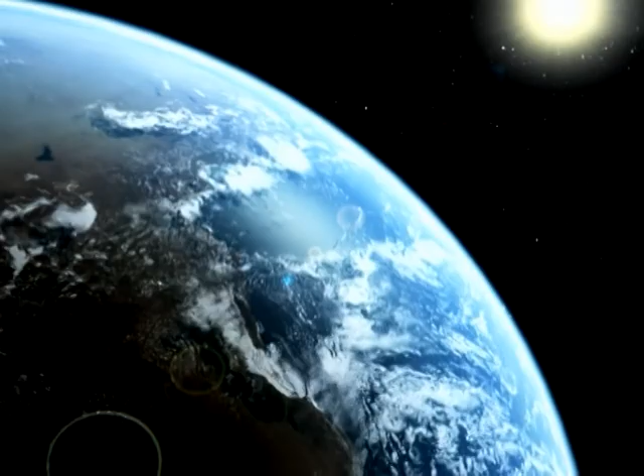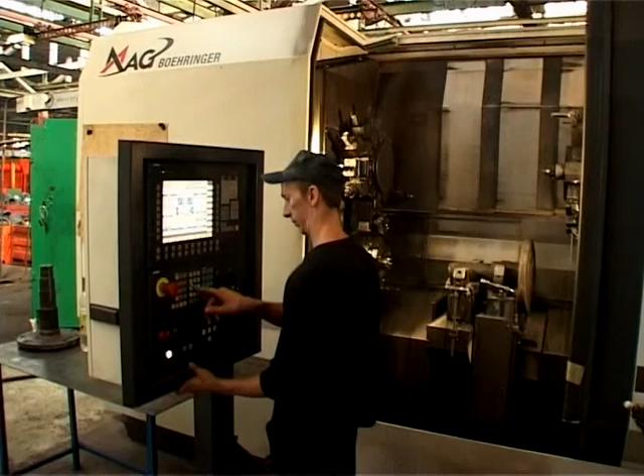The Republic of Belarus, the city of Gomel. There are main plants of the company Gomselmash, which has been known in the market of agricultural machinery since 1930. The modern Gomselmash is an innovative way of development, flexibility and multiple profiles, manufacturing different models of machinery for different purposes, providing most technological processes connected with harvesting of the main agricultural crops with machinery made by one manufacturer.

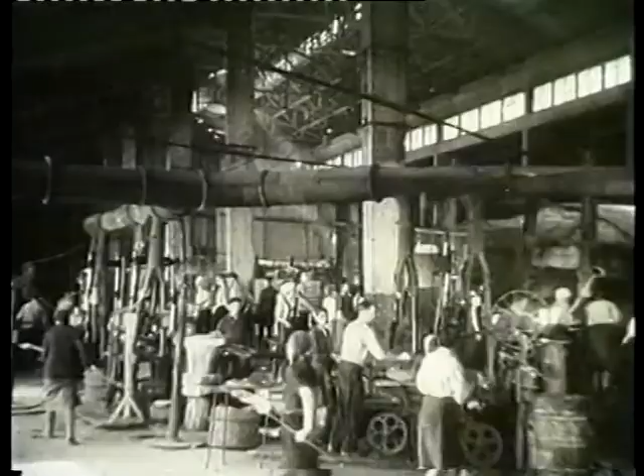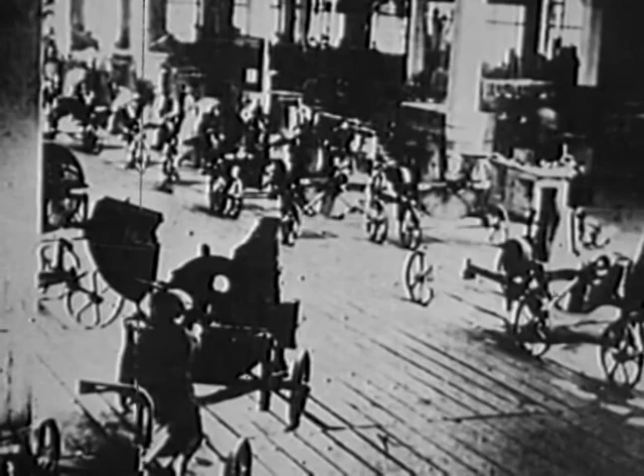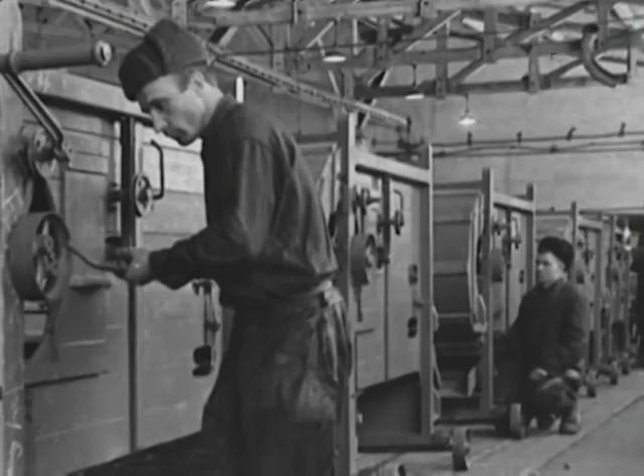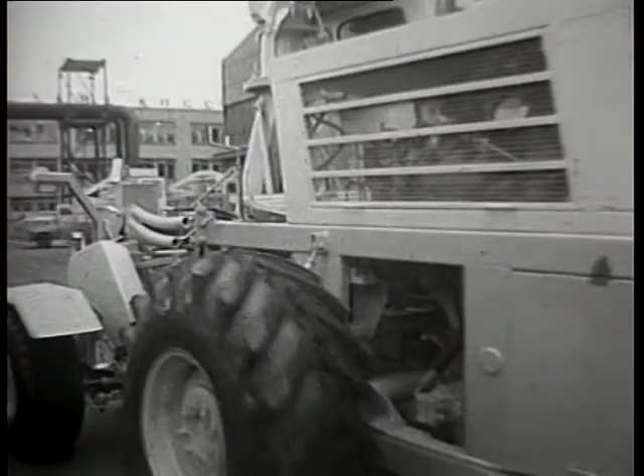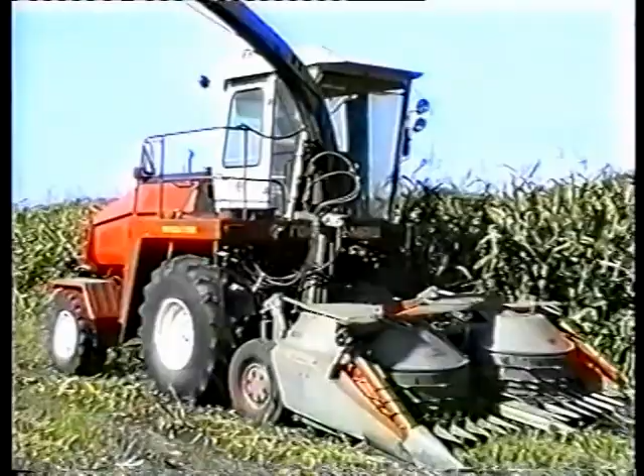From manufacturing simple agricultural machinery in the 30s and 40s, to the largest manufacturer of pull-type and then self-propelled forage harvesters, from a plant to a large production association, this is the way Gomselmash has passed in the next four decades. The acquired experience was used in manufacturing block module complexes of machinery on the basis of the universal power machine, which came off the production line of the association at the end of the 80s. It was the power machine that became the basic one, on the basis of which the constructors of Gomselmash manufactured grain harvesting complexes at the end of the 90s. The machinery opened a new important branch in Belarusian machinery construction.

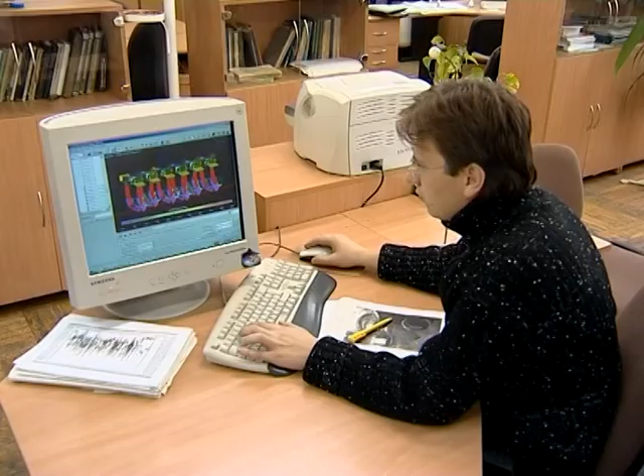The absolute priority of the customer's demands, care of his profit, are at the basis of the whole work of Gomselmash, beginning at the first stage of the creation of a new machine. The design and service of the company is a large, well-equipped scientific technical center. Its specialists solve problems of how to create machinery which would be effective not only in the present, but also in future conditions. Virtual studies allow getting a highly reliable image of functioning of units of the future machine at the early stages of design.

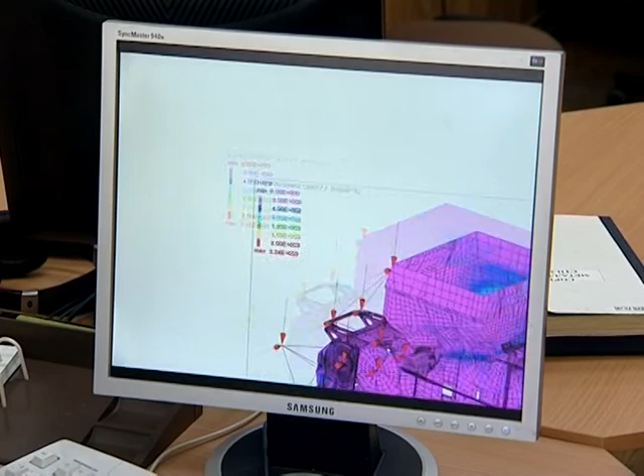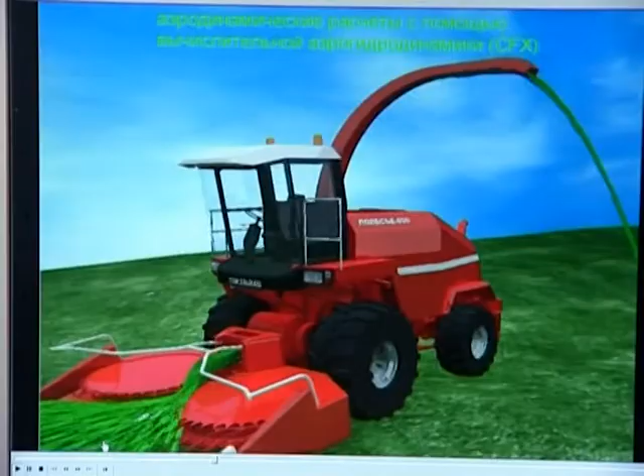If necessary, calculations using supercomputers are made. Specialists from different scientific research institutes of the National Academy of Science are invited. The modern instruments used by constructors allow shortening the time of creating a complex machine at least 1.5 times in comparison with recently used computer technologies.

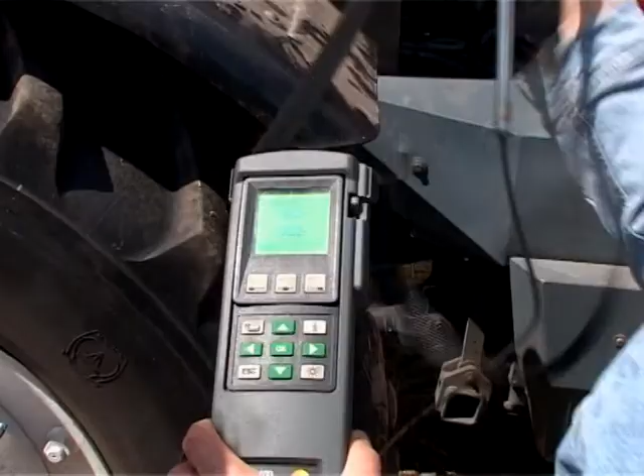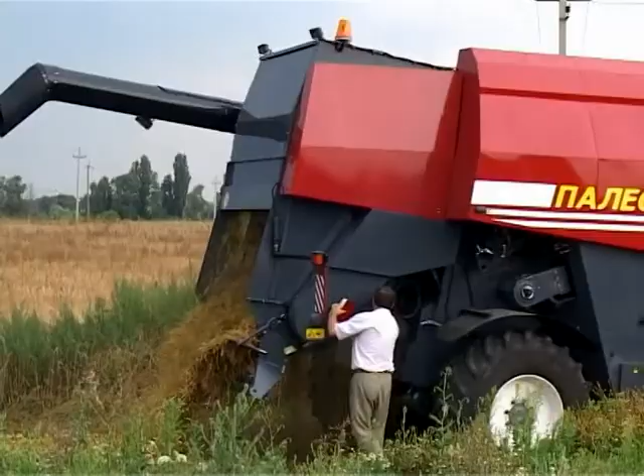Field tests done in different soil and climatic zones give the constructors material for detailed analysis and improvement of the machines being created. To provide the maximum effect from each kilowatt of the engine's power, from each liter of fuel, to raise the quality of harvesting and lower the payback period are the tasks of the creators of the machinery.

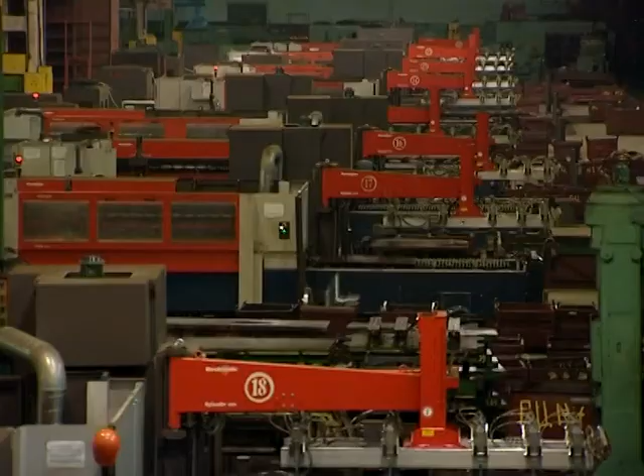In order to react promptly to the demands of the market of agricultural machinery, Gomselmash constantly renovates its technological equipment. At the same time, priority is given to flexible engineering complexes from leading manufacturers whose products are considered to be the best in the world.

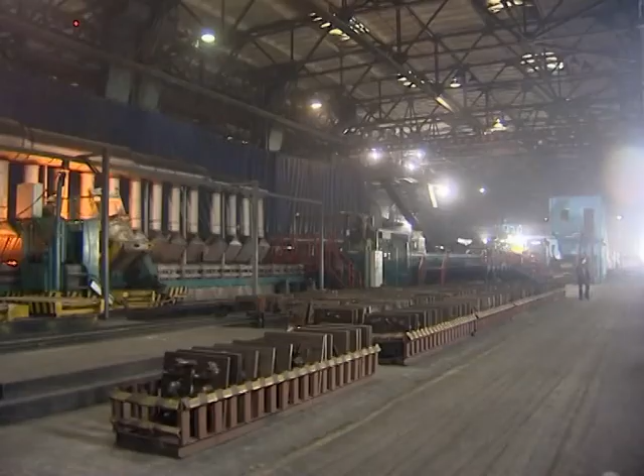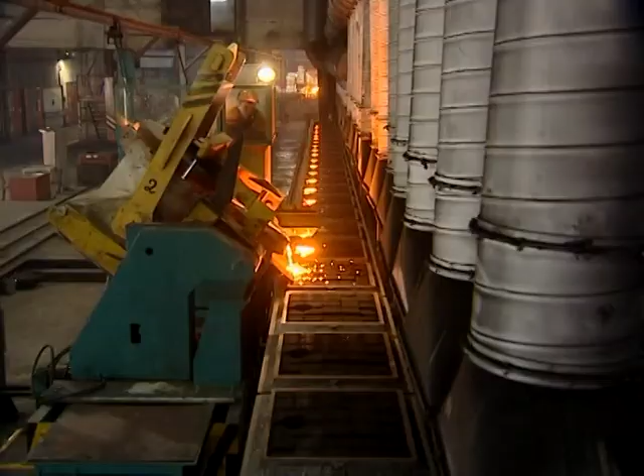Of great importance for Gomselmash are works on the modernization of the foundry. In the foundry, there are inductive furnaces of average rate for smelting cast iron of high solidity. These furnaces work automatically and have program control of charging of the furnace. To perform melting, they choose the most economical regime of energy efficiency. The molding line with CNC works efficiently. Along with economy and getting metal of high quality, the new equipment allows improving ecology.

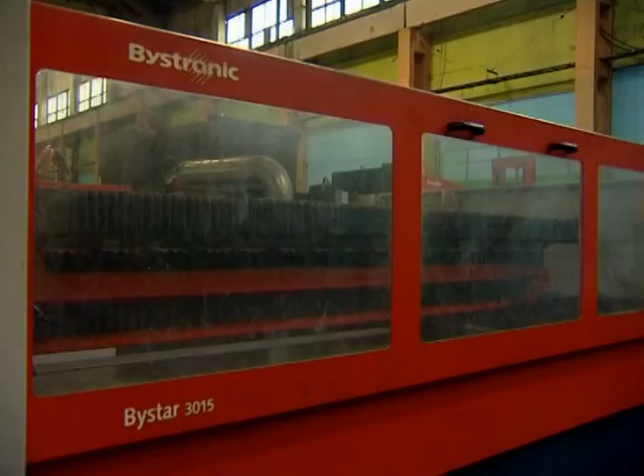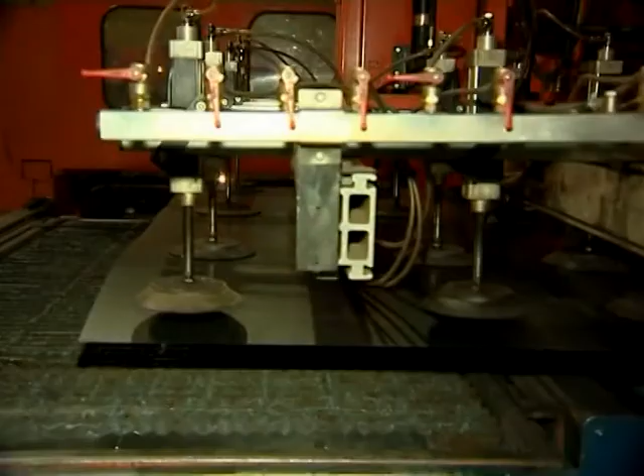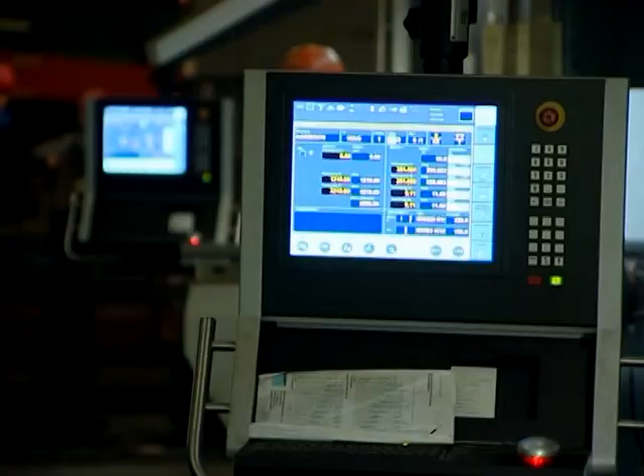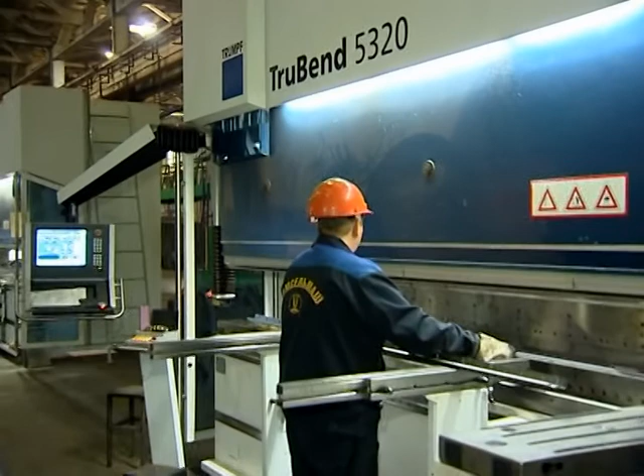In press preparing production, laser cutting machines with CNC control allow cutting out parts of any configuration from metal sheet with thickness up to 14 mm, completely at once, without additional machining and with minimum waste. Operation rate is kept up with automatic transport systems which feed metal sheets for cutting. Sheet bending machines with CNC control keep in their memory 50,000 kinds of different bendings. Parts of complicated shape are bent in different planes up to 10 times. Such rapid manufacturing of complicated parts without expensive press tools and welding is cheaper, more durable and with high accuracy. This is the main quality of the laser cutting machines and presses with CNC control.

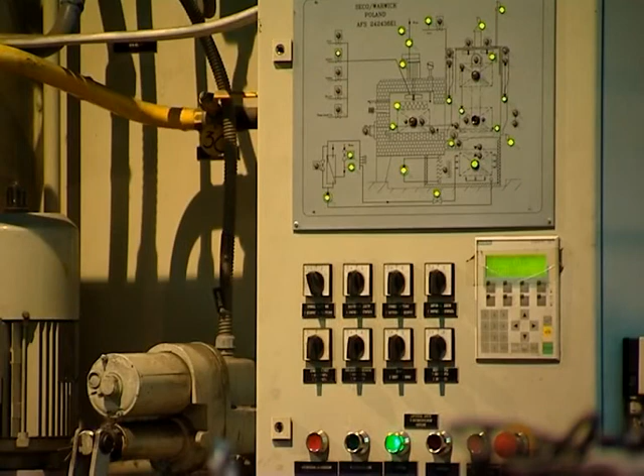In heat treating production, automatic lines of chemical heat treating allow performing complex processes of heat and chemical heat treatment of metals such as carburizing, carbonitriding, hardening, clean annealing, low and high tempering. All processes are controlled automatically with the help of program software with minimum participation of the operator.

This allowed raising considerably the quality of heat treatment of units and the reliability of manufactured machines, improving working conditions and lowering power intensity. The mechanical process in production is equipped with new, progressive equipment with CNC control of the processing center type.

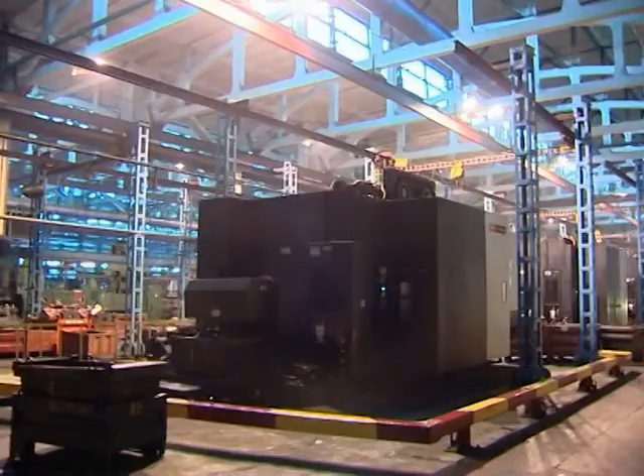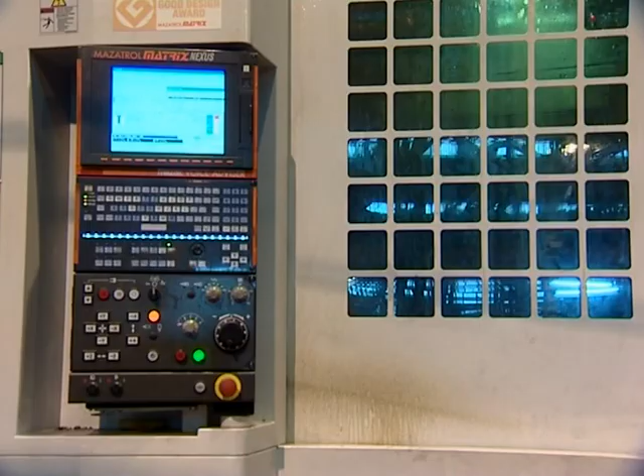This raises labor productivity from 2 to 5 times. Multipurpose lathes with the use of the driving tool work at high speed. The equipment with the new type of tools allows treating complex units on two sides at one and the same time.

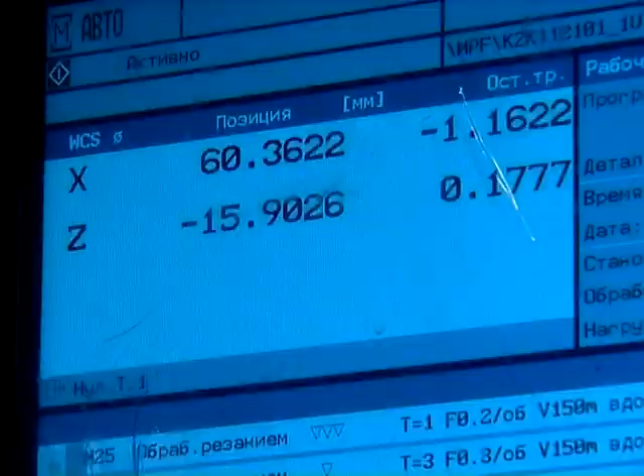Highly efficient centers for the treatment of gearboxes and highly accurate equipment for manufacturing gears raise the quality of manufacturing of mechanical transmission. Modern measurement machines are used to raise the accuracy of manufacturing of units.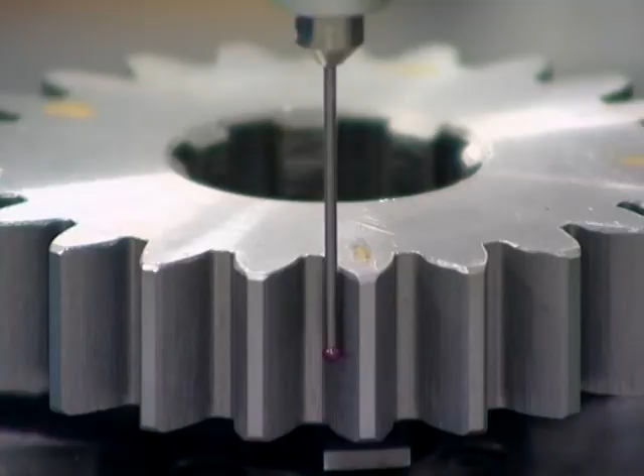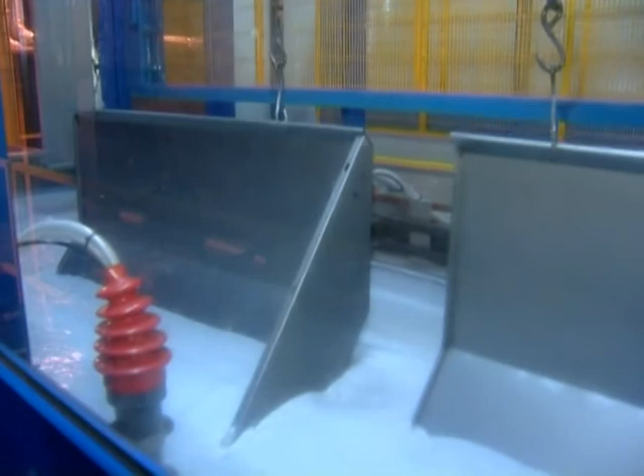The introduction of modern technologies in paint production allows getting covers of exceptional solidity with improved decorative features. In the combined production system with computer control and management, ground is laid with the help of the method of cataphoresis, merging with the metal at the molecular level. Use painting in automatic regime by dispersing powder paints without using solvent.

Grain harvesters became the main product of the production association Gomselmash, and in order to enlarge the capacities of their production, deep modernization of the general assembly and production line with the opening of a new conveyor line has been done.

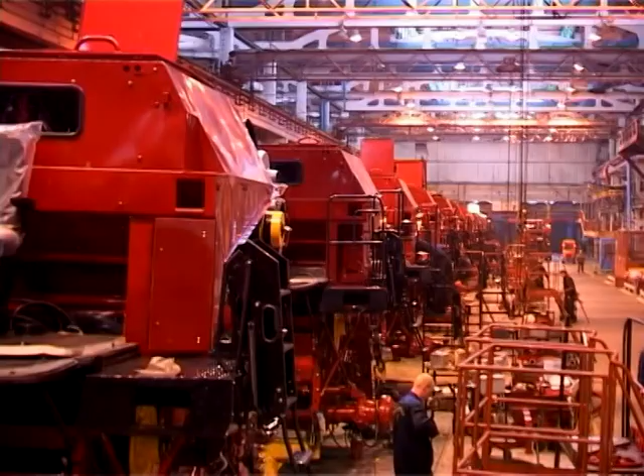Since 2008, grain harvesters have been assembled on the new line, and the selective delivery of units from the block of workshop donors is done by the system of pendant lines.

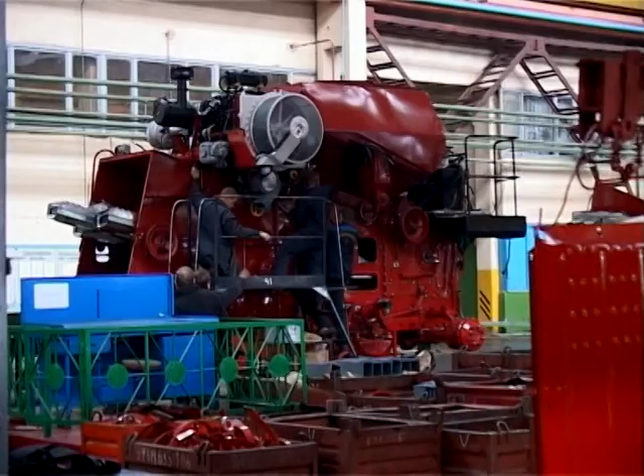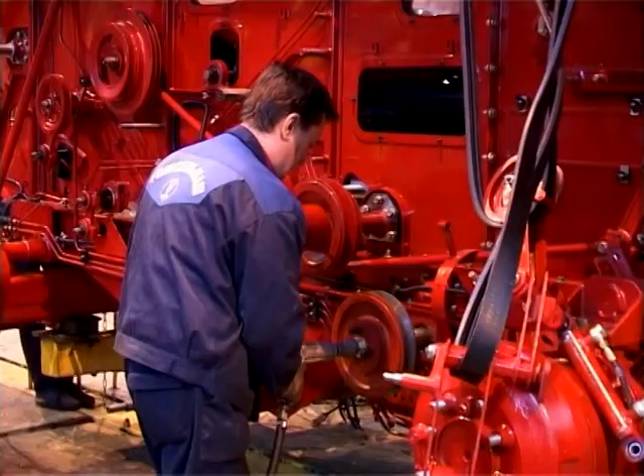The manufacturing of all models of grain harvesters in the modernized assemblage production provides the growth of the quality of assemblage and makes Palesia harvesters more attractive for customers in different countries and regions.

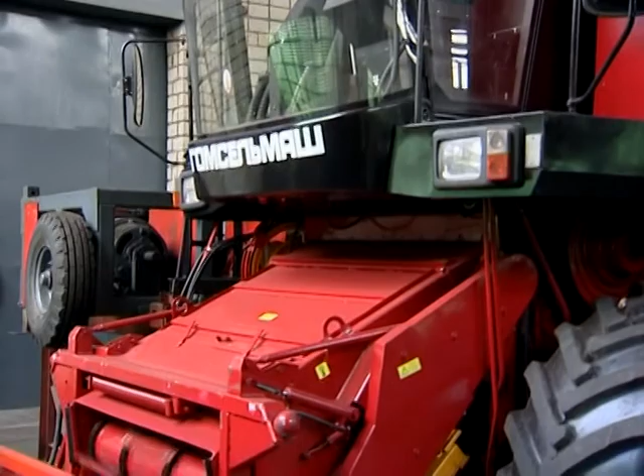Systems of management of the quality of design in production and technical service of the manufactured machinery are certified according to the standards ISO 9001-2009. As a result of tests, the main types of machinery, including new models of grain harvesters and forage harvesters, have got certificates of the European Union.

The main type of product under the name Palesia is grain harvesters. A model row of harvesters, including machines with different throughput capacity, has been created.

The grain harvesting combine KZS 812, Palesia GS 812, with capacity at grain mass not less than 8 kg a second, is a maneuverable machine with a reliable and simple one-threshing drum, easy driving and service. The combine is most effective in fields with crop capacity of 40 quintals a hectare.

The grain harvesting combine Palesia GS10 is also a one-threshing drum model of the classical scheme, but its capacity at grain mass is not less than 10 kg a second.

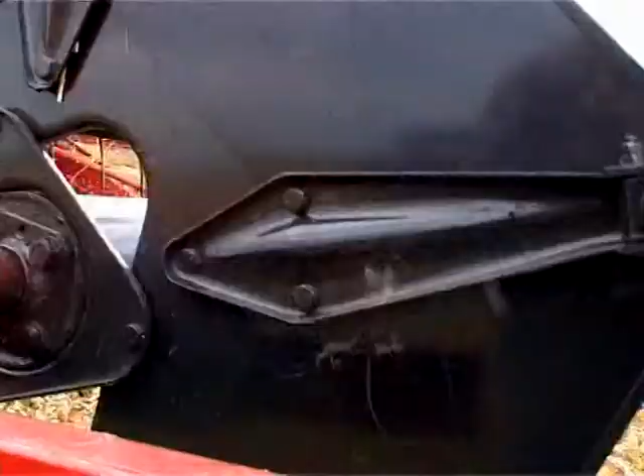Palesia GS12 is a combine for serious purposes. The threshing system with two drums with propulsion feeding device provides a capacity at grain mass not less than 12 kg a second and is well adapted for harvesting high-yield crops, including threshing crops with humid cereals.

All the combines Palesse are equipped with a 3-stage cleaning, which allows getting clean bunker crops of high quality. Each of the models allows harvesting straw, laying it into swaths, or crushing and throwing it across the field.

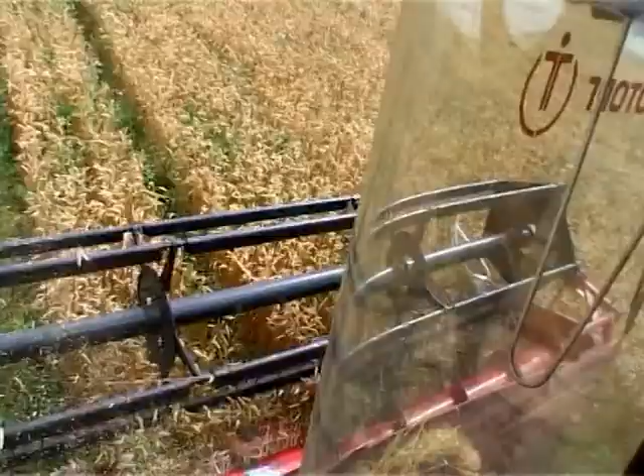All models of the combine are equipped with modern cabins with panoramic window, an additional seat, an air conditioner, as well as an onboard computer.

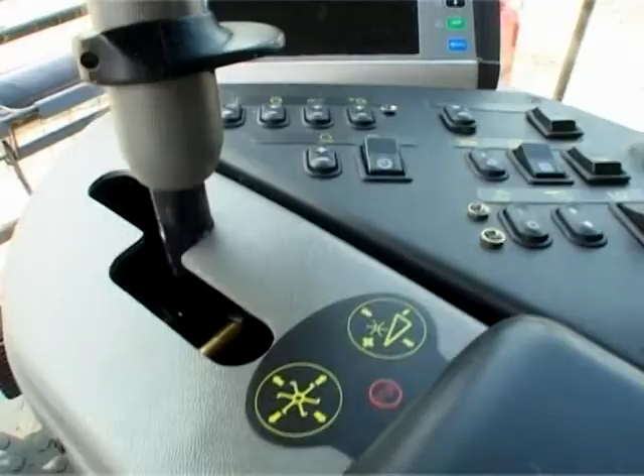Gomselmash continues creating grain harvesting combines of high quality, which must combine high capacity with moderate power inputs. They also constantly improve the design of production machines and create new modifications.

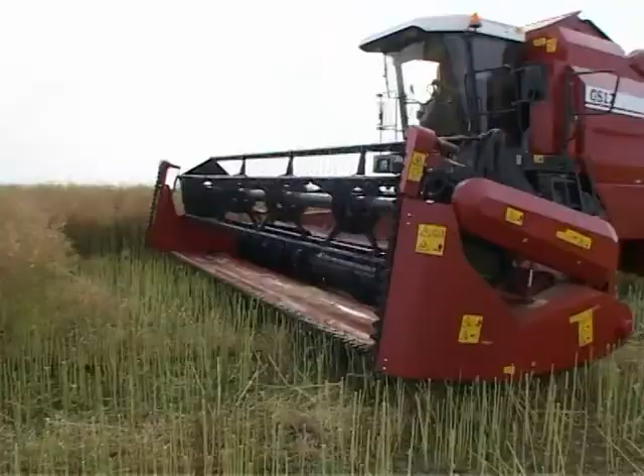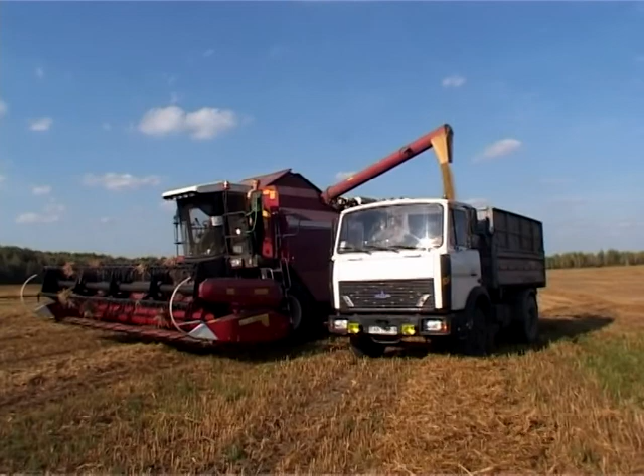Pull-type roll headers, Palesse, and crop pickup attachments are efficiently used in separate crops harvesting. Such adapters as devices for rape harvesting, sets of equipment for maize harvesting for grain, and crop soy headers enlarge the loading of combines and shorten the period of their payback. For many farms in different countries and regions, crops harvesting machinery Palesse has become a serious factor of quick harvesting of high quality.

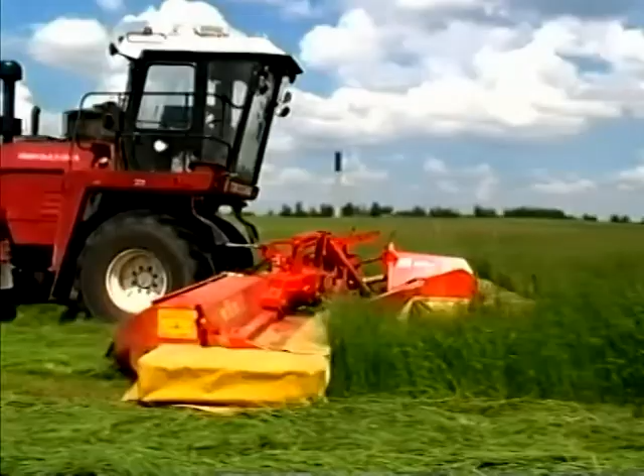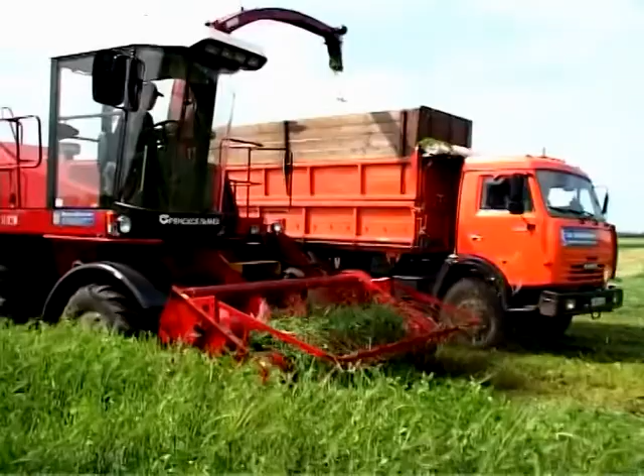Forage harvesting machinery Palesse is in great demand in the markets of agricultural machinery in different countries. The self-propelled forage harvester Palesse FS60 with a 235 horsepower engine is a machine for mass use. The combine is manufactured at joint enterprises and works with the use of machinery sets of Gomselmash.

The forage harvesting complex Palesse FS80 with a 450 horsepower engine is a machine for farms which store up forage in large quantity. The quality of these complexes has been proved in real conditions, as well as in extreme conditions of forage harvesting by farmers from Argentina.

The powerful forage harvesting complex Palesse FS8060 with a 600 horsepower engine has an onboard computer. A number of forage harvesting complexes with 380 and 600 horsepower engines are manufactured on its basis.

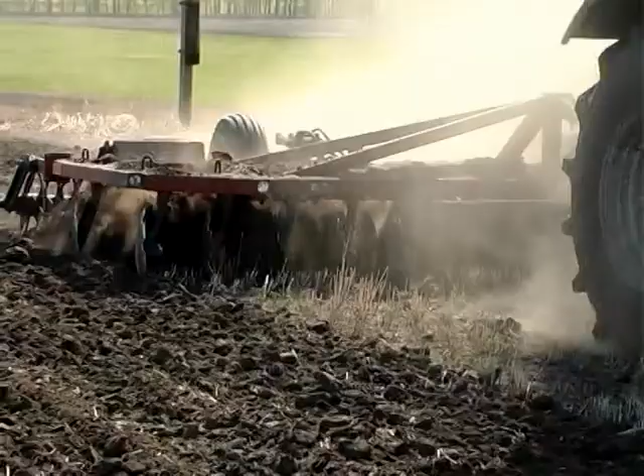The forage harvesting machinery is also represented by universal power machines with 260 and 290 horsepower engines, which are used to store up different kinds of forage with removable mounted machines and adapters. The new universal power machine Palesse U450 can be used not only with harvesting machines, but also on tillage with modern multi-effect plows and sowing harvesters.

They also manufacture pull-type and mounted forage harvesting combines, and pull-type and mounted cutters.

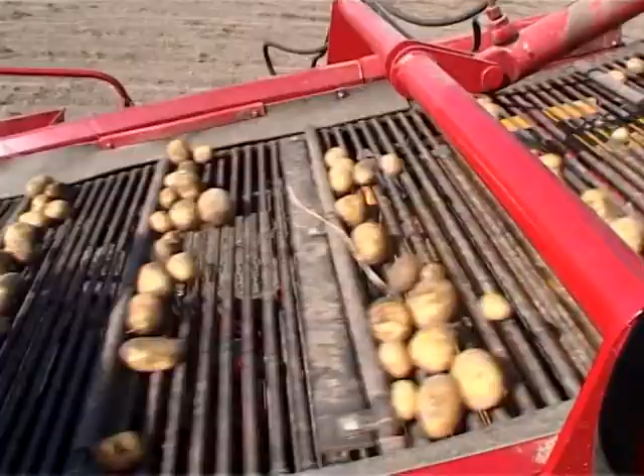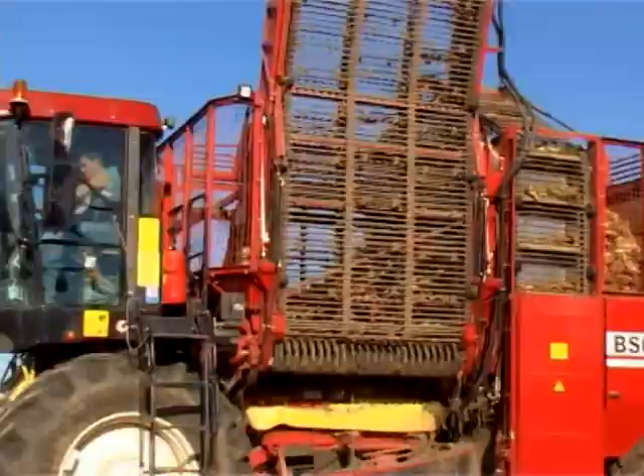Besides grain harvesting and forage harvesting machinery, Gomselmash also manufactures potato harvesting combines, which are used with the most popular models of tractors. For the modern single-phase harvesting of sugar beet, the highly efficient self-propelled sugar beet combine Palesia BS624 has been manufactured in the CIS for the first time.

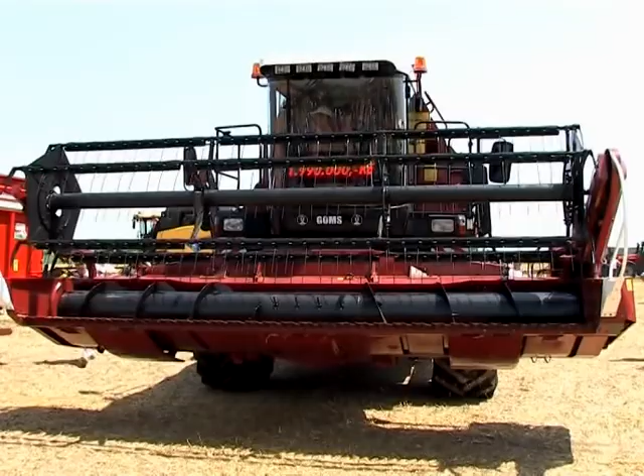In the Republic of Belarus, the machinery Palesia makes up the largest part of the whole park of combines. Gomselmash exports its machinery to different countries, among which there is Iran, Argentina, the Czech Republic, and Slovakia. The main customers are the countries of the CIS.

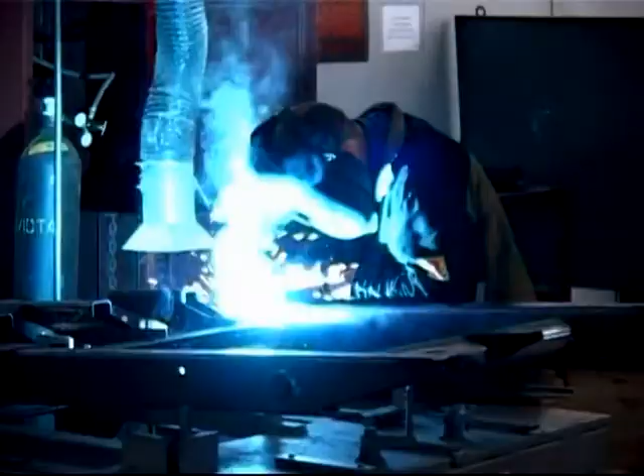Bringing the machinery to the customer and making it more accessible becomes possible due to joint enterprises and works in different countries. They manufacture combines Palesia with the use of machine sets of Gomselmash, as well as units of their own production. These machines are adapted to the conditions of local markets and can be manufactured under local trademarks.

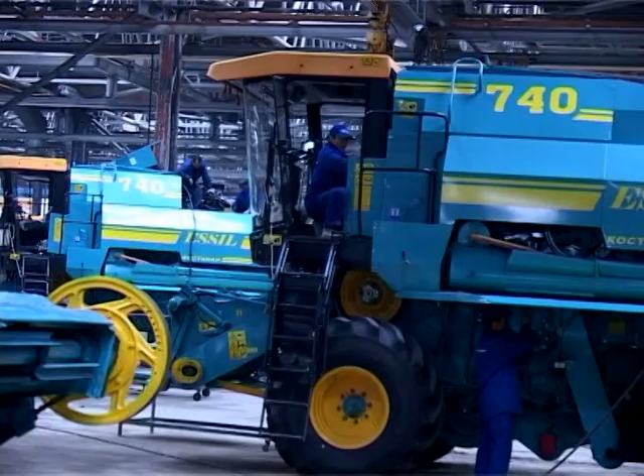This way, every year in Kazakhstan at Kostanay Diesel Works, they already manufacture hundreds of grain harvesting combines Essil 740 with the use of sets of Gomselmash. They also master the assemblage of new models of combines.

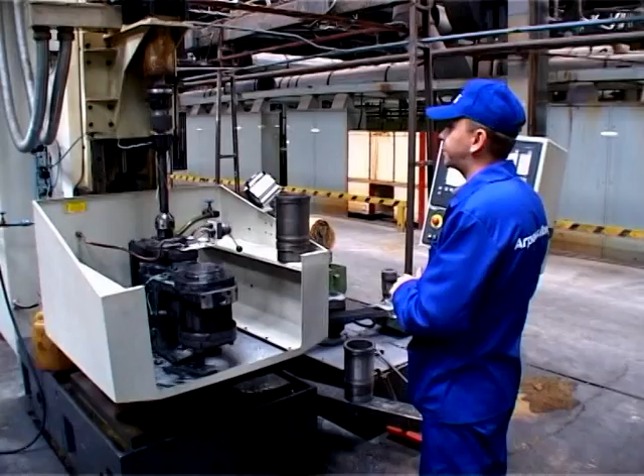In China, at the joint enterprise in Harbin, they assemble forage harvesting combines and master the production of absolutely new machines - corn ear harvesting combines. Having begun with the assemblage, each joint enterprise then masters more complex technological operations.

The well-organized brand name service is one of the main answers to the question why customers in different countries choose the machinery Palesia. A wide network of dealer centers functions according to a single enterprise standard.

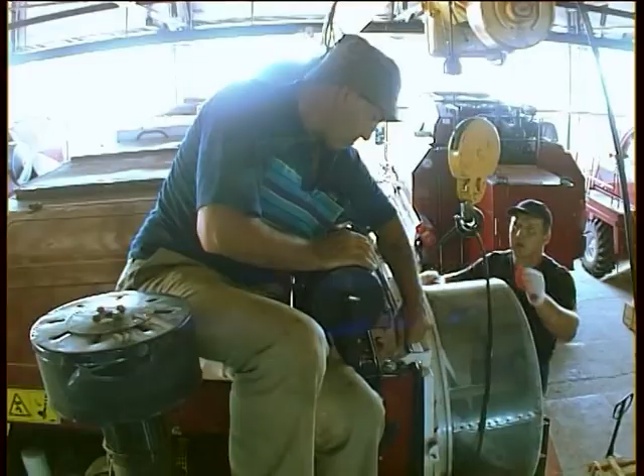The dealer organizes field demonstrations during which every potential customer can see machines Palesia in use and get exhaustive consultations. The dealer will make before-sale preparation and additional assemblage of machines, and will organize courses for machine operators both at the manufacturing works and at the dealer center.

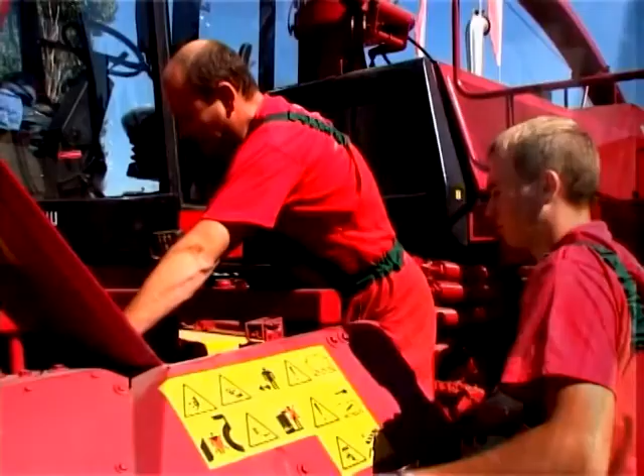They will help the customer with a credit or leasing contract. Specialists at the dealer center will put the machine into operation and teach the machine operator how to achieve non-failure operating time. When necessary, a brand name replacement part will be put in the combine within a short period of time after the first call, and the machine will return to work for the client's profit.

The competent and quick service helps reveal the potential of the combines completely and minimize harvesting costs. That's why more and more agricultural manufacturers use the combines Palesse as the main ones on their farms.